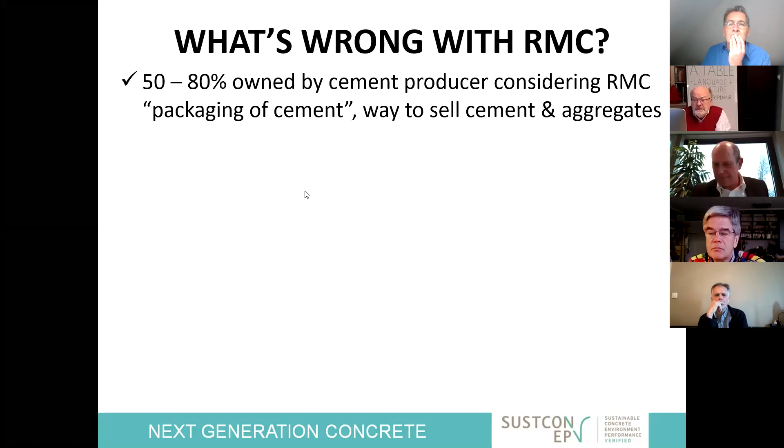Thank you, Johan. I'll try to make it very short. I sent out a questionnaire to everybody to have their input on what they consider is wrong with ready-mix concrete. I received only a few. The one most remarkable said, I'm not going to tell you because otherwise we will only buy prefab. But that was not the answer I needed, okay?

Of course, what is wrong, here we have a list. It is owned, for 50 to 80%, by the cement industry. And as somebody said, they consider it packaging of their product. You can see that when they charge you €4 more if you want concrete with less cement. And of course, the worse the aggregate, the more cement is needed.

Process control is Labcrete, which is not quality control of the actual product, because the structure is Realcrete. We have 27 different EN206s, so make your choice which sauce you want over that EN206. This has nothing to do with technology, that is pure market positioning.

The production and the placing is done differently by different companies who can blame each other. And the language of communication is a problem, and there's no basic training, etc. You are welcome to complete this list. Next, please.

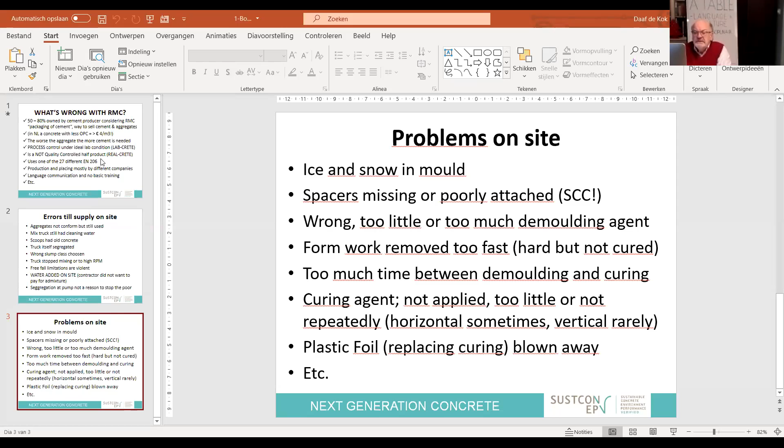Now, the other one was, where was it? Well, this was a little too fast, Dave. Maybe you can bring it back on the screen. No, the second one. Errors on site, what is wrong? Okay, next. Maybe I messed it up. You just go to the next slide.

Errors still till supply on site. Aggregates are not conform but still used. We don't like to send back a truck or a shipload of aggregates when it's not in quality. Mixed trucks have cleaning water, scoops had old concrete, trucks itself segregate, wrong slump, truck stop mixing, free fall limitations are violated, water added on site is the biggest one. And we know all that because the contractor doesn't want to pay for admixture, so the cheapest admixture is water. Okay, segregation at the pump.

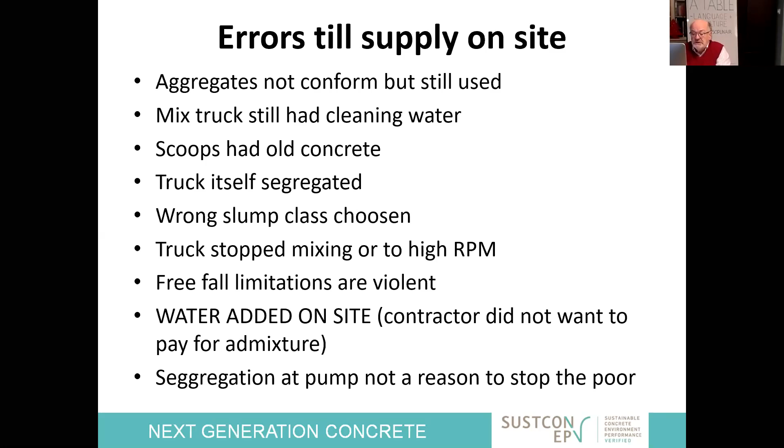The next, please. You all get these, of course, in the manual. Ice and snow in mold. I wish this was a problem in the Netherlands.

Spacers missing. We have seen somebody filming a self-compacting concrete pour where all the spacers just floated away. And of course, people are not going to stop the site because that's too much of a hassle.

Now, big problem, demolding agents, too little, too much, too thick, formwork is removed too fast. In the past, we used to have wooden formwork, lost formwork, which was a fantastic curing means.

Now the companies that have the mold, the formwork, they are there the next day to take it away. So too much time between demolding and curing agents not applied, too little, not repeated, etc. Plastic foil is blown away, etc.

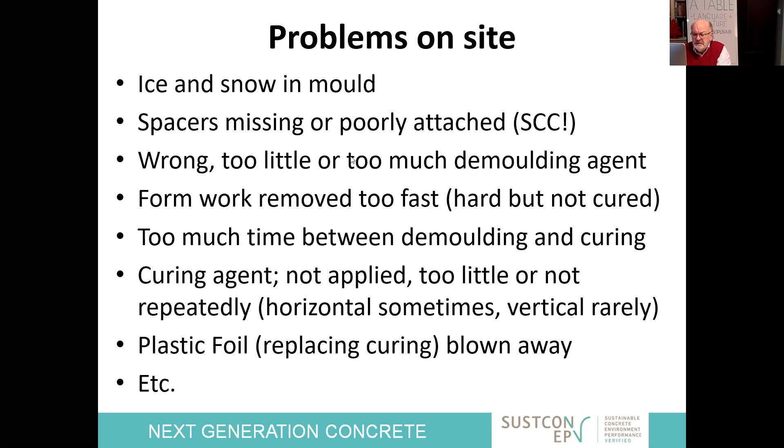So here are all the problems shortly listed. I have not qualified them too much and not quantified, but this is a good base for this afternoon.

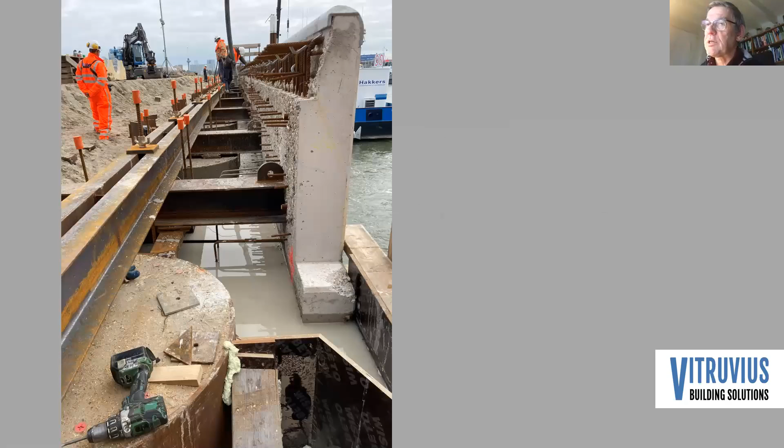May I have the next slide? Then you can see what this was, the work. The concrete was used to fill the gap between the prefab outer layer in a harbor and the wall, and so we did a lot of tests on that. May I have the next sheet, please?

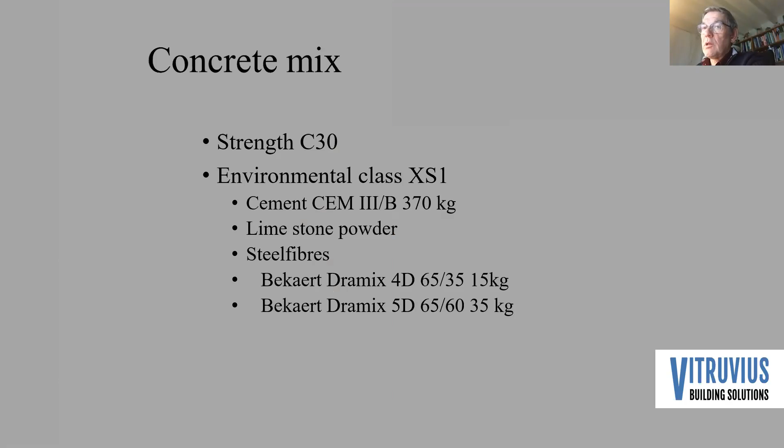The concrete mix was the following: strength C30, environmental class XS1. We used a lot of cement in it, 370 kilos, because we had a lot of steel fibers in it: 50 kilos of steel fibers, long ones at 35 kilos, and very short ones at 15 kilos.

Afterwards, we made a lot of test specimens. About half was cured underwater at 20 degrees, and the other half was cured in air. The water cured gave a nice result of about 43 megapascal at 28 days for a C30. Air cured only reached 36.

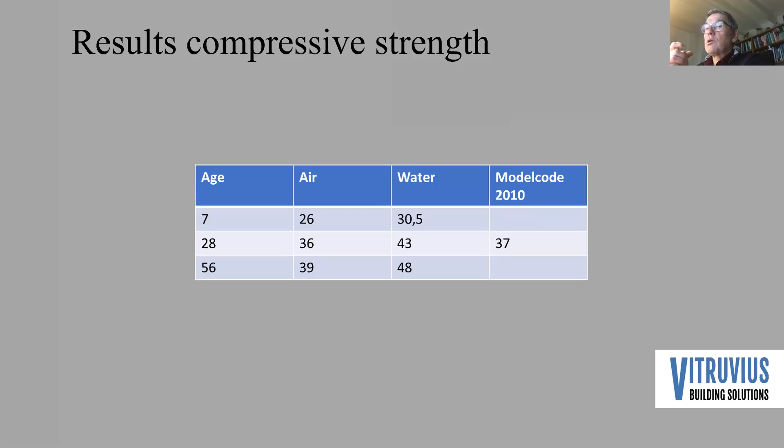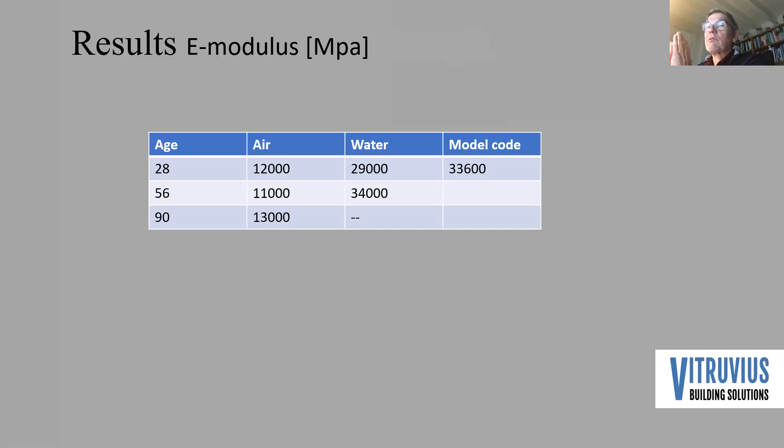We also did the Young modulus, and what we found was that the air cured samples were about a third of the water cured. So the construction engineer was getting a bit nervous because he got numbers he wasn't used to.

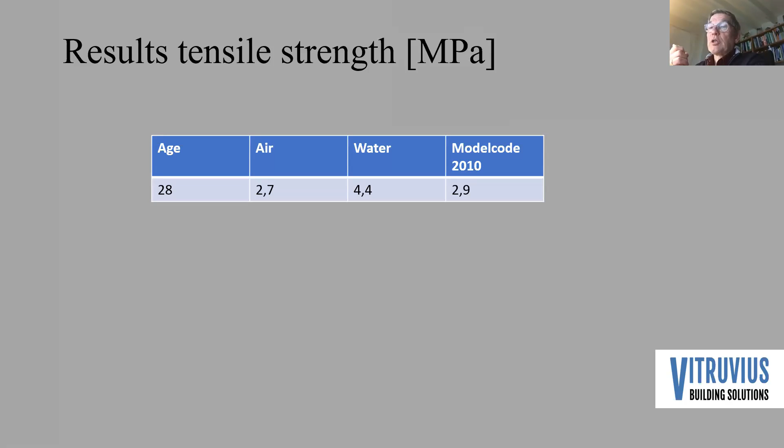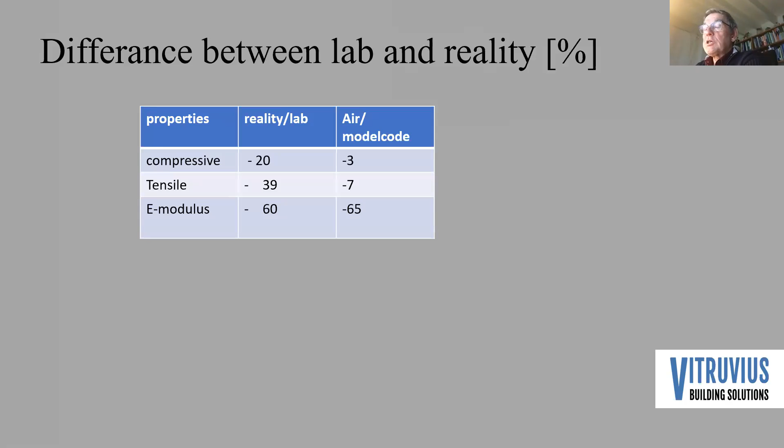If you look at the difference between the two, depending on the condition and what you are measuring—compressive, tensile, or E modulus—the difference is between 20 and 60% lower if air cured. So only if concrete is cured underwater do you find the properties used in the codes. Depending on the curing conditions, the top layer of a construction will be at least 20% less durable, and in the worst case, 60% less than expected.

Thank you very much for your attention.

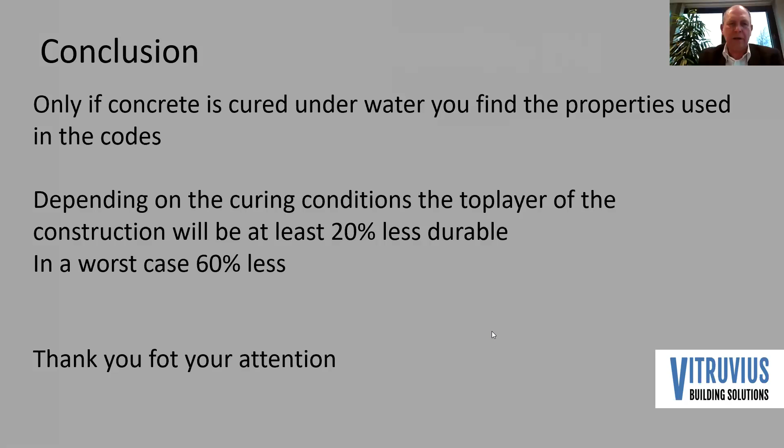Does anyone want to comment on the presentation? Johan, you have two pages, you have to look also at the second page. What do you mean with two pages? You see on the screen there are two pages, you mean the chat. I don't see anyone raising their hand, or— Yes, hey, yes, okay, Danilo. Dan, yes, go. Dan is raising a hand.

Yes, please. We don't hear you, Danilo. Good afternoon, everyone, can you hear me? Yes, yeah, yes, now it's okay. I just pointed on a question. I want to know more about the conditions of humidity in the air in which the samples were treated. Can you describe more, please?

The humidity of the air cured samples was about between 60 and 80%. But then, from my experience, what we wanted to say—in ex-USSR countries we usually cure specimens in air, but in very humid air, about 95% humidity. So these results are usually far better than water cured. Have you experienced such a different situation?

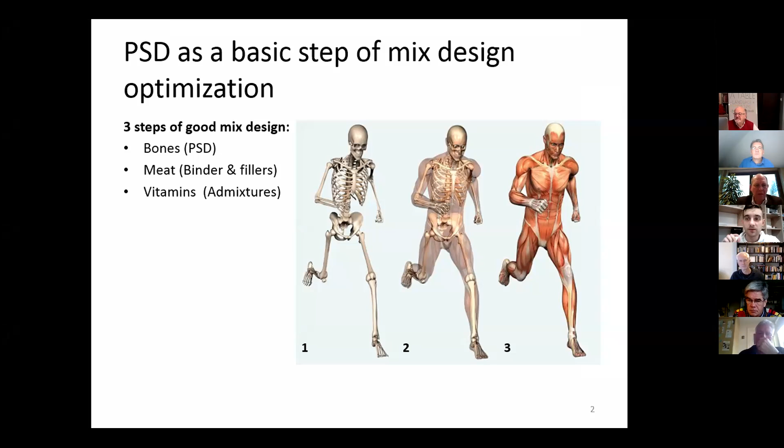Usually I explain the mix design in a very simple way—I compare it with the human body. First, we should create bones, the so-called granular skeleton. Then we put some meat on it, which means binder and fillers, and then salt it with some amount of vitamins, admixtures, and this gives the concrete some superpower. But my very clear message to you today, as a founder of a Ukrainian admixtures company, is that with a broken leg, vitamins are not effective. If you have to fix something, you should first look at the granular skeleton and start your mix design from there.

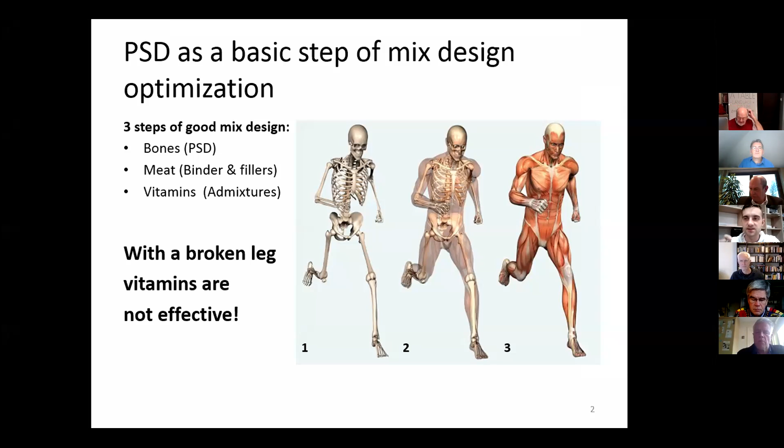Our methodology is based on manipulating the voids content. What really matters from the side of aggregates? This is simple, 3 factors: grading, surface shape, and surface texture.

Of course, there are many more characteristics of aggregates that should be considered in the mix design, but I will focus your attention on these 3 because they affect mostly the packing density.

So what we do is blend different materials and measure the bulk density, which represents the void content. It's very simple, just a cone and a bucket, that's all.

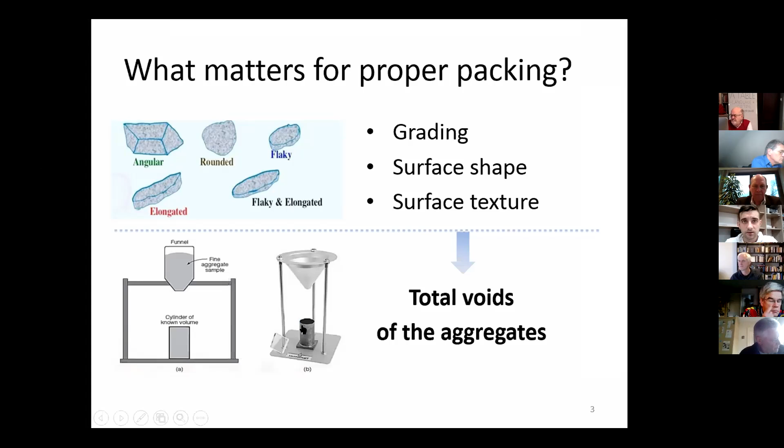So, of course, our methodology is competing with the traditional grading approach and specific surface concept. But I want to show you some examples.

There is one ready mix plant supplied by one quarry. They erected a new crushing line. The old one, which you see on the left, used the old material with a flakiness index of 32%. On the right side, you can see, look on the video.

So this is a totally different concrete, just from changing the flakiness index from 32% to 11%.

We were also very surprised that with the same formulation, same mineral, same RMC plant, everything the same, just the flakiness index moved, we got this kind of result. We have less voids, more paste, and the concrete is more flowable, more creamy, even though the grading was completely the same.

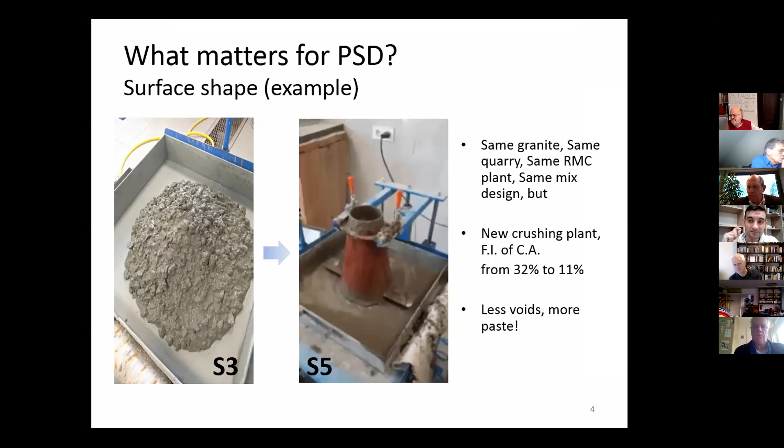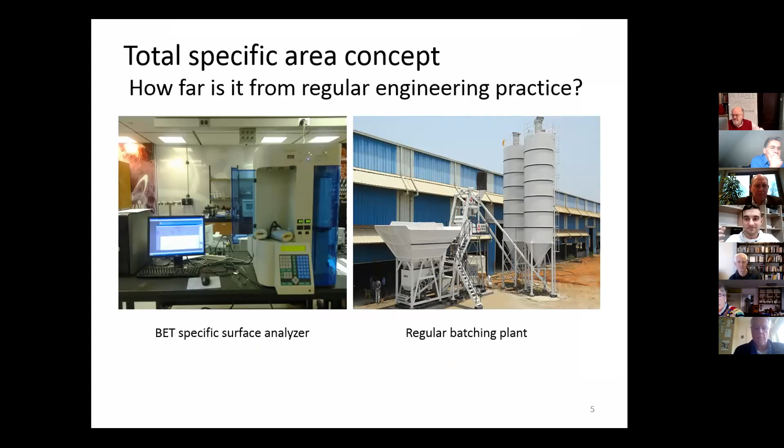And what about the specific surface concept? Just look at this sophisticated analyzer for specific surface area versus a regular batching plant. How far is it from regular engineering practice? So I guess the cone and bucket is pretty simple and useful in real practice.

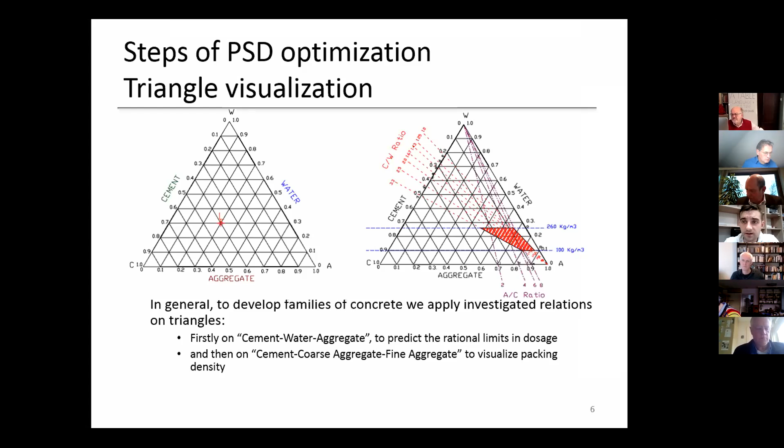Our methodology started from building triangles for visualization. For voids content optimization, we use a triangle with cement, fine aggregate, and coarse aggregate. I will not have much time to describe the methodology in detail, but I put the information in the slides. You can look thoroughly there later and ask me questions.

This will help you understand it. But in very short time, I will describe it. First, we optimize the fine aggregate and the binder, and then we optimize the coarse aggregate voids content separately.

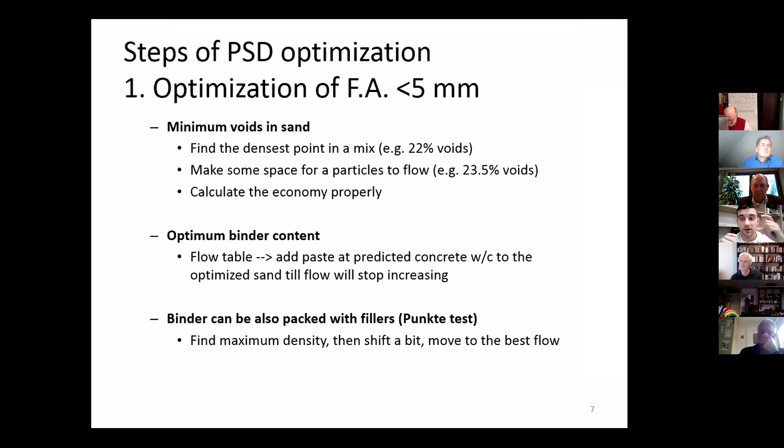You can also use this methodology, the so-called Puntke test, to optimize the granulometry inside the binder. Then you put the three parts together in the best proportion to have less cement, less CO2, and be more cost efficient. Usually if the rheology is better, the compressive strength is also higher.

And of course you have to do some fine tuning after moving from the lab scale to real scale, and check the laboratory results against production. Thanks for the attention. If you have any questions, you are welcome to ask me.

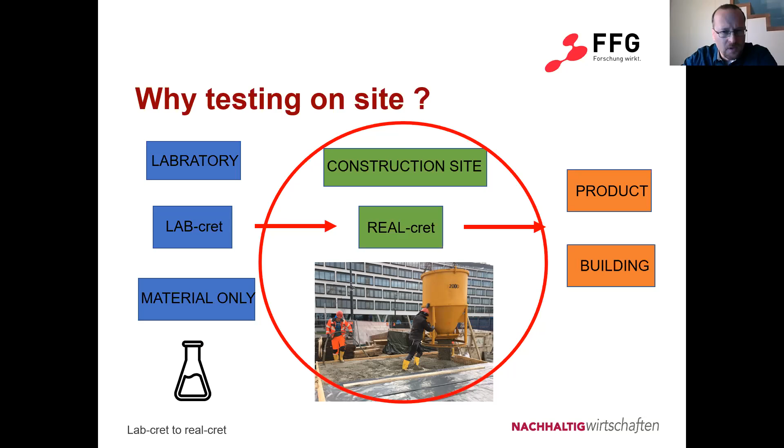The big problem, next slide please - the problem is that the culture of our construction is a bit different. In the past we had the first concretes, this is the green line, and the concretes today are high potential concrete.

They are high-tech materials optimized for easy handling on site. This is the blue line - the work the workers have to do to bring the concrete into the formwork is getting lower. We use super plasticizers and retarders to optimize the concrete so it's very easy to handle on site. The horizontal line is given by national rules and normatives for curing the concrete and how to bring it into the formwork. The dotted line is what we sometimes see on site.

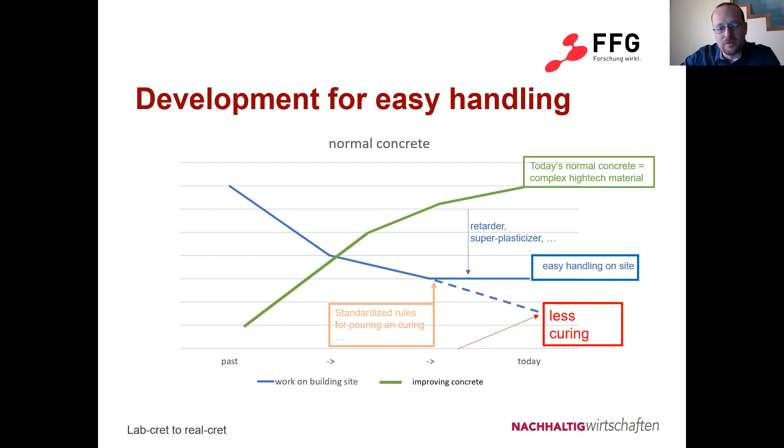The workers use the high-tech material - next slide please, go back two slides if possible - this standardizes the rules, and so we see on site that sometimes there is less curing. They do everything to save money. There are sometimes mistakes on site, and sometimes less skilled workers use the concrete as well, because the concrete is high-tech. It does everything - it's sometimes self-compacting, it's good to bring in, and we have no problems with standard high-tech concrete.

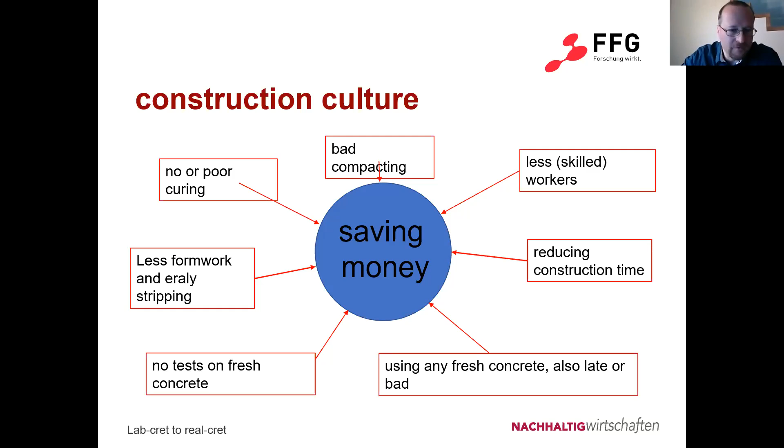I don't want to say everything because I have so little time. Please go to the next slide. This is the problem: RCC concrete needs to be cured, needs care in bringing it in and pouring it. We have to cure it - as Bodin said, this is very necessary. And as Johannes Horvath said, we need guidelines to use it. We have some, but not for every concrete concept, and for this concrete we now want to use, we have no guideline. So we are going to test that, to move on from Labcrete. We've done a lot of laboratory tests, but we need on-site tests to see what we can get and how we can handle that.

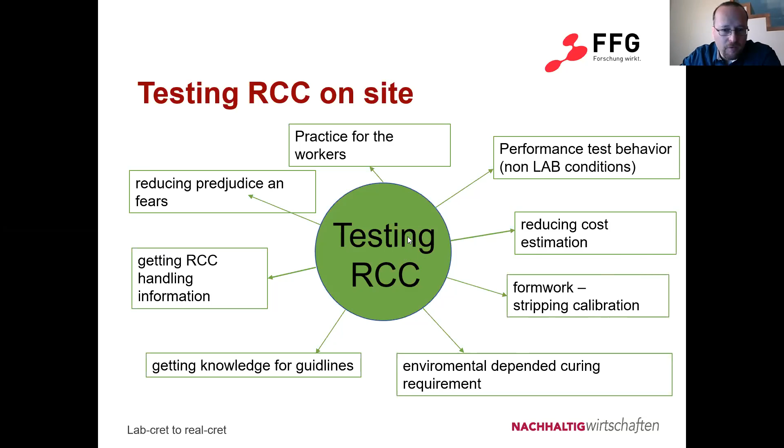In the next slide I made a sketch showing what testing brings us forward to use RCC concrete: practice for the workers, reducing the prejudice and fears of contractors that it's too expensive, or they can't handle it, or the quality isn't good enough. Getting RCC handling information means quite the same - getting more knowledge for guidelines. We are designing guidelines, as you heard yesterday from Johannes Horvath. We can test the environmental-dependent curing requirements - the temperature and curing conditions we can give to the concrete. And formwork stripping calibration - when can we get the formwork free?

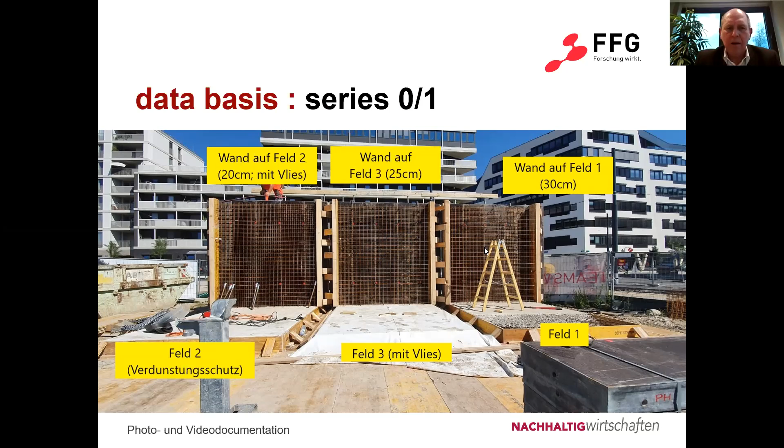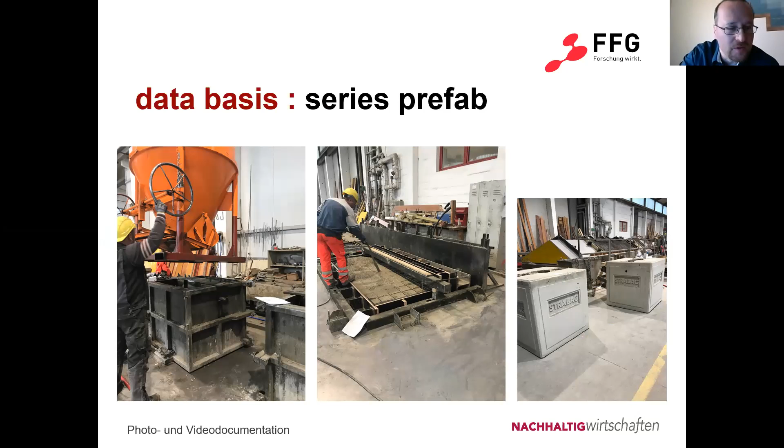Yes, these are the results. Johannes told us we have some results to produce today. Maybe you can look in detail at the given information here. Concluding, we tested some thickness walls and slabs and the curing effects, and now we are in a way to give advice for the site to use the concrete on the real building.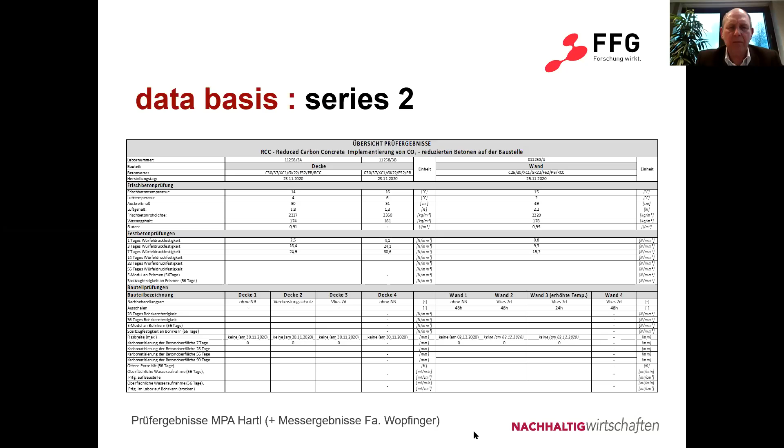Thank you very much. Apologies for the beginning, I was referring to reinforced cement concrete, but it's about reduced carbon concrete. It's a new terminology. It's important, and it's this kind of exercises and demonstrations which we will need to convince contractors to use the new materials.

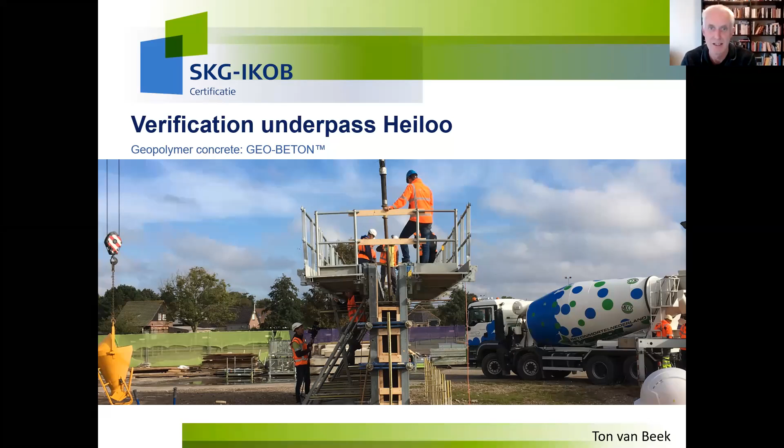Next slide please. To start with, I first have to explain what verification is, because as technical manager at SKG IKOB, normally we do tests for certification, and we go to companies, ready-mix concrete plants for example, to see if they do their checks and have their lab concrete okay. But now we had something very different, something innovative. How do you deal with this innovation?

This verification is explained by two axes: one is early research, a brilliant idea, and the other is when it's available on the market - the horizontal line and the vertical line. In the beginning you have no standards at all, and in the end, once it's complete, you have a lot of standards on the vertical line. Next step please.

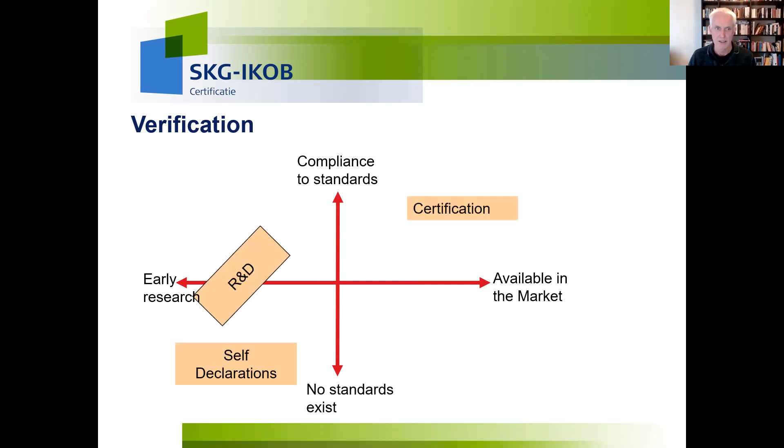So you begin with R&D, a self-declaration of your product, in which you say it's brilliant, it has low carbon performance and very high strength - that's normally what everybody says about his new product. Then later on, but there are no standards in the beginning because the product is completely new. It's not within the current standards we have for concrete.

So we have to see how to deal with this performance claimed by the man who made the facility that produces the concrete. Only after many years normally can you go to standards and certification, but this time we used a verification process instead. Next step please.

In this verification we didn't need certification yet, because we only wanted credible performance data of this new product, this geopolymer concrete. Next step please.

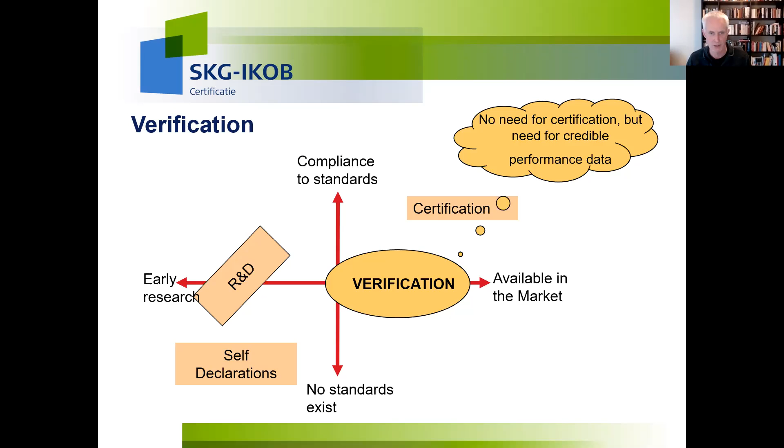And we did this through prototyping, and Heiloo was kind of a prototype. This verification process is presented here as a linear process, but I can tell you it wasn't really linear - there was a lot of debate, a lot of discussion. But we started with a brilliant idea about building this underpass with a wall in it made from geopolymer concrete. There was a technical design, with a lot of material parameters from the laboratory, the lab concrete.

And that was the first assessment: can you make with this lab concrete a real concrete structure? So we made the first report. It said, okay, if you look at this data, it should be possible. Then we went to the control situation in real time during the construction, and in the end we made a statement: the following performances were valid, backed by a lot of data from the contractor. So we had a lot of data, and in the end it could be used in practice. Next slide please.

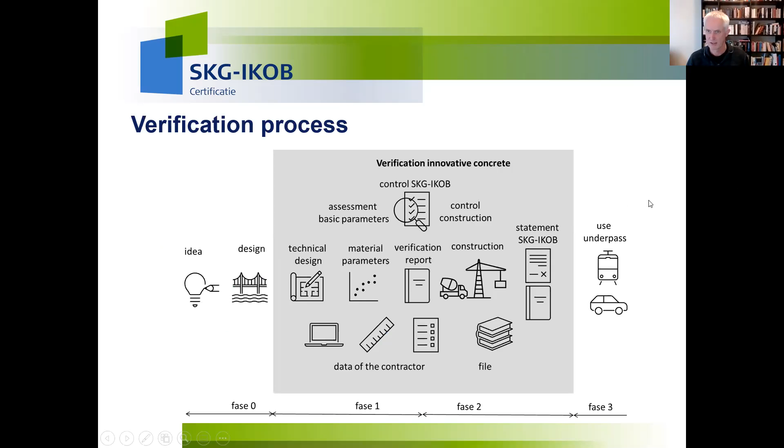Because the performance of structure can be of many different types. I took the 7 normal performances of a structure as stated by the European Committee: mechanical resistance stability, safety in case of fire, hygiene, health and environment, safety in use, protection against noise, energy economy and heat retention, and sustainable use of natural resources.

But not all those performances are always applicable for every structure. So in this case we did a risk analysis and said only the mechanical resistance, the impact on the environment, and the sustainable use of natural resources were looked upon.

So we asked the contractor: how do you give me, as a certification body, your performance of the structures, and what proof will you deliver that this mechanical resistance, this leaching to the environment, and this low carbon impact will be proven?

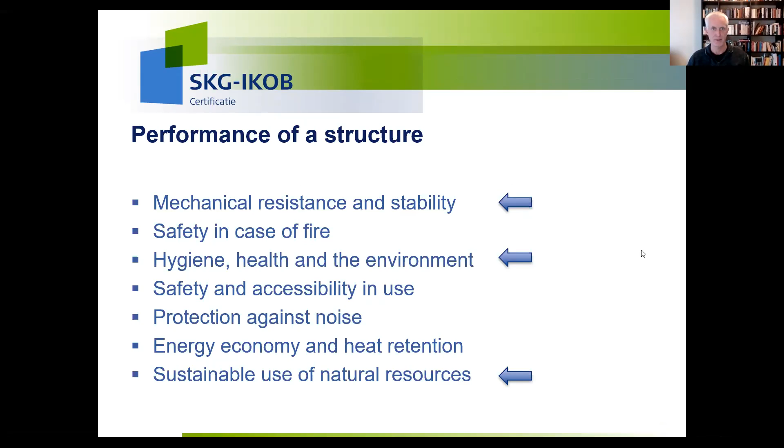Now, for the performance of the structure, a lot of lab tests to begin with just to get a good mixture. We also asked them, how do you give instructions to the ready-mix concrete plant? Because they have to make this concrete, and they never made this concrete before. How are you going to teach these people that this concrete is the same or different, and what are the differences also on safety?

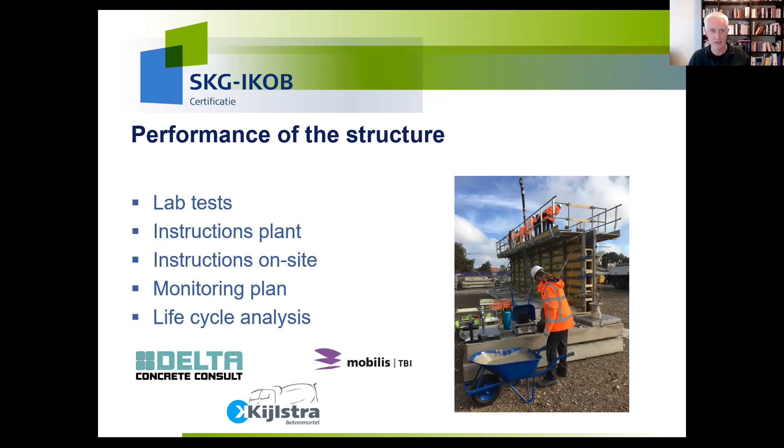The same applied to instructions on site. Are the people working on site well informed on how to deal with this new type of concrete? And once this concrete is in the structure—you see here a picture of a mock-up they made before they made a real wall—this was one of the methods to learn how to deal with this concrete.

And how to do tests on this concrete—not only lab tests, but also a lot of field tests to see if the curing compound worked well. We also got a life cycle analysis from this concrete structure to see if it really achieved carbon dioxide reduction, yes or no.

The conclusion of this complete process was rather funny, because it was designed as a concrete structure. We all know that geopolymer concrete is not concrete, but it looked like concrete in practice—it behaved like concrete, poured like concrete, and there was really nothing different.

One difference was that there was a lot of attention by a lot of people looking at it. I've never seen so much quality control on site as during this project.

And in the end, the performance of the concrete—mechanical, etc.—yes, most of the performances were met with ease, to be honest. Also the difference between lab test and field test, as we heard before—if you took the safety factors into account, it was okay. Thank you for your attention.

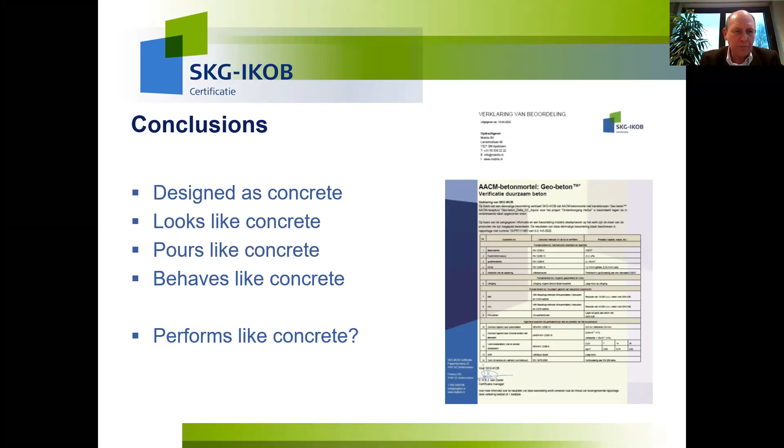Thank you very much, Tom. It was a very interesting lecture—working with these new materials but still making reference to the construction product regulation, trying to show that this material behaves like other concretes, and you can follow what's happening with the necessary verification.

I thought you spoke about a linear process—did you say a linear process? I would just suggest we have to go to circular processes. Everything in the future should be circular. So feedback from your testing to the lab, but I'm sure you're doing that.

Any other questions for Tom? We had some questions in the chat on the presentations which will be shared. I see Boudewijn has a question, but Boudewijn, just stand by—let me check if there are other questions. If not, Boudewijn, I'm pleased to come back to you since you're the organizer. I understood we'll also have 5-10 minutes of discussion on a presentation given yesterday—can you address whether we stick to this program or change the schedule a bit? We're not too bad on timing.

Yeah, just to comment on the presentation from Tom—there is a very important dimension to this verification, and that is the coaching. Because you're doing something new, and you don't hide behind a standard saying look at Article 2.5.3. You are really getting into a new field with a lot of attention, like Tom said. So the coaching aspect of verification is also very important.

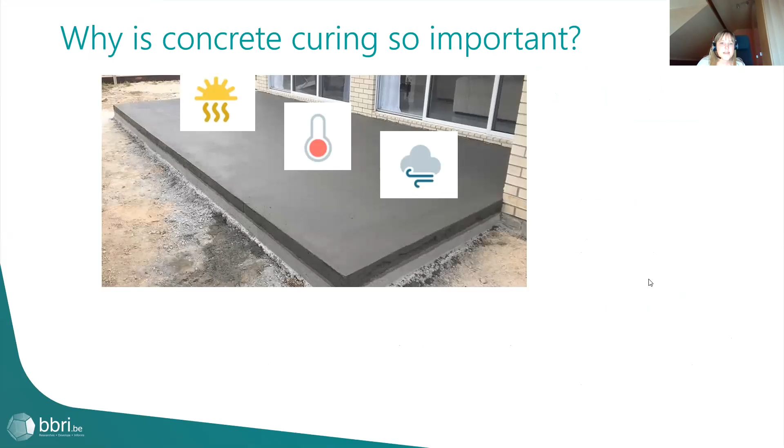The consequences can be dramatic, such as a bad strength development, cracking due to plastic shrinkage, thus reducing the lifetime of the concrete, and also a bad appearance.

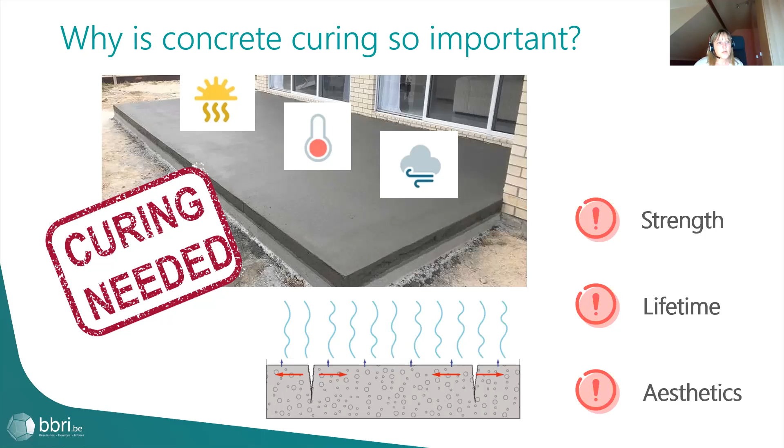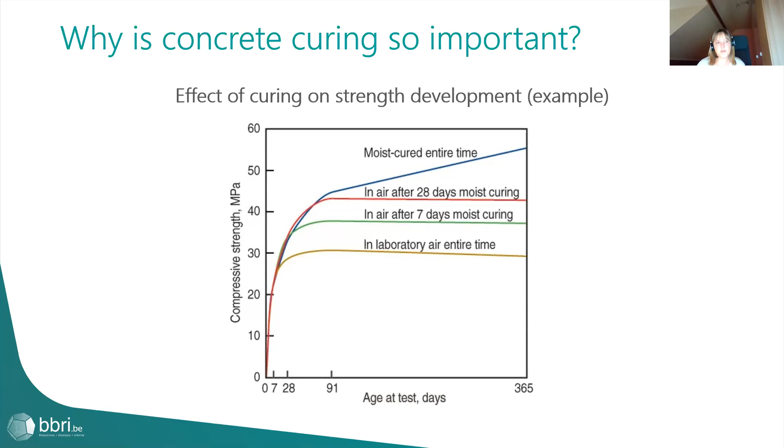You see here what can be the effect of curing duration on the compressive strength development of concrete. No curing, shown in the yellow line on the graph, leads to a drastically lower compressive strength than that obtained when applying moist curing. But we have already seen other examples in the previous presentations. And in addition, we have to keep in mind that new habits, such as the use of additions in concrete, make it even more sensitive to curing than OPC concrete.

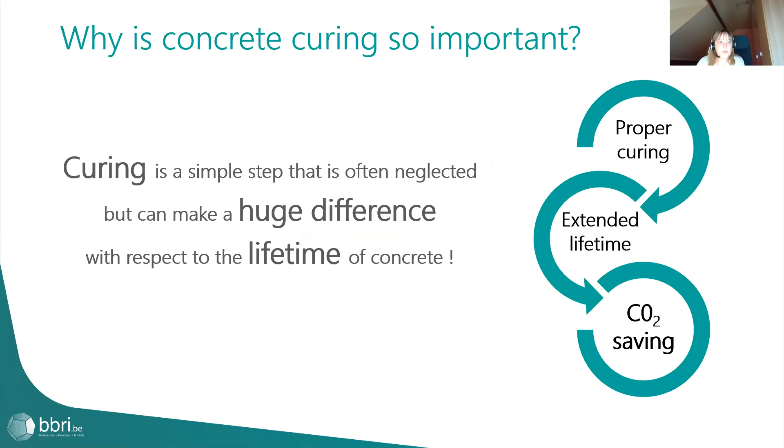So remember that curing is a simple step that is often neglected, but can make a huge difference with respect to the lifetime of the concrete structure, and makes it possible to get the most out of concrete. And this way we can say that it leads to a reduction in CO2 emissions.

One of the easiest ways to cure concrete in place of conventional and prolonged wet curing is to apply a liquid curing compound on the concrete surface. How to do that? By spraying the product immediately after placing and finishing for a floor or slab, or after demolding for vertical surfaces. When correctly applied within recommended dosage, it forms a surface film that reduces evaporation of water from concrete.

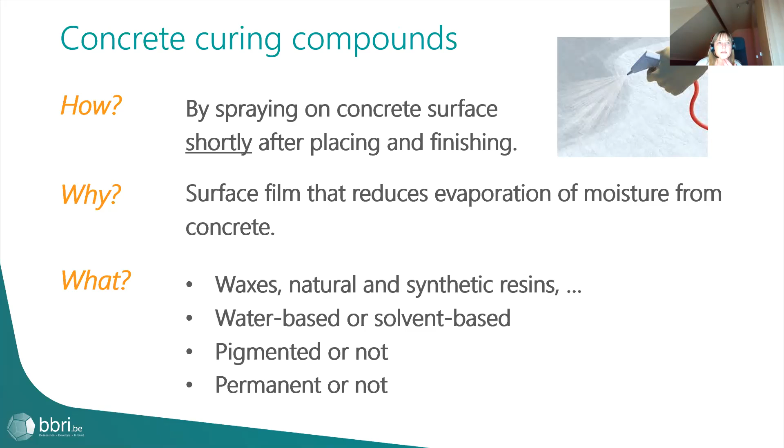These chemical products are mainly waxes or resins emulsified in water or solvent. They can contain pigments useful to check the covered area and also to provide heat reflectance. But be careful, as most curing compounds have to be removed prior to applying any coating. Here you can see some types of concrete elements on which curing compounds may be applied, such as roads, bridge decks, walls, and slabs.

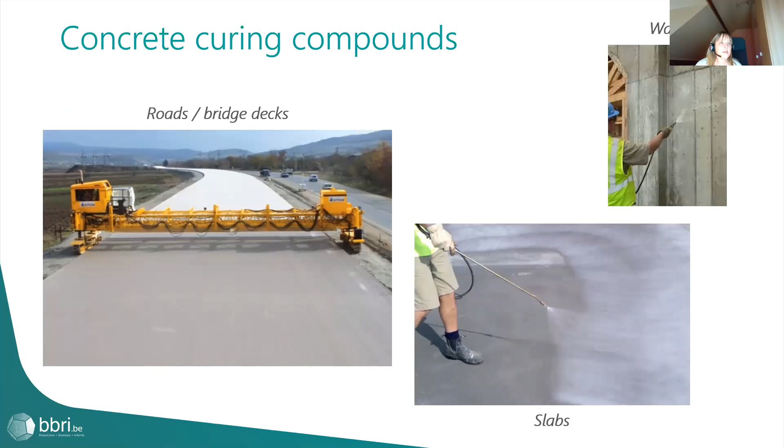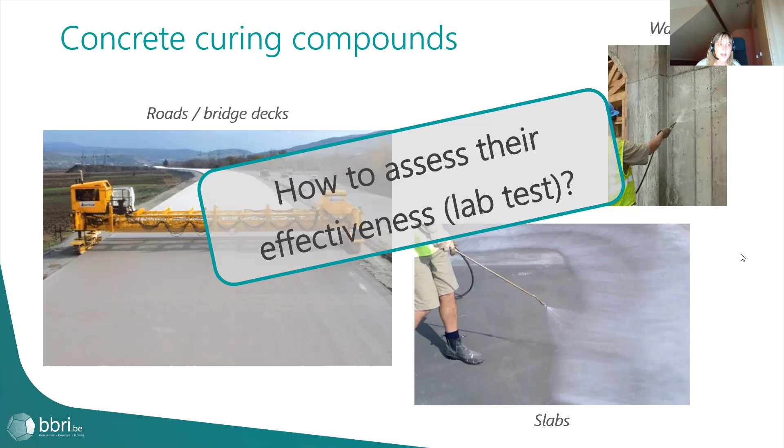For all these applications, there is an obvious need for a reliable test method to quantify the effectiveness of these products, to be sure to obtain a high quality concrete. For this reason, we have initiated a research project in Belgium. The main goals are to refine the existing test methods, but also to review the criteria used to decide whether a product is performing well or not.

A European technical specification provides a water loss test in lab for the qualification of curing compounds. Based on this, some European countries have published their own modus operandi. In Belgium, this is included in the technical prescription published by the certification body BE-CERT. This document does not yet give full satisfaction, and as a result of our research work, we hope to be able to publish a revised version within 2 years.

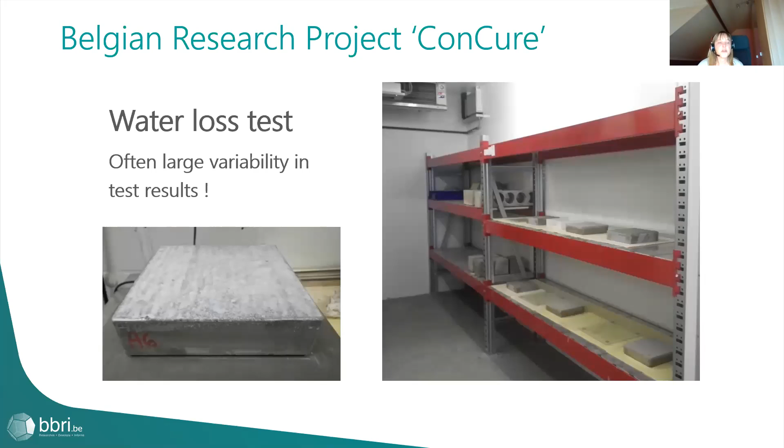The principle of the lab test is simple at first sight. It's a matter of comparing the loss of mass of specimens covered with curing compounds with that of reference specimens. But there are many parameters involved, including the concrete mix design, the way of removing bleeding water, and so on. So the method often exhibits large variability in test results, and this makes it difficult to decide whether the curing compound passes or fails the test.

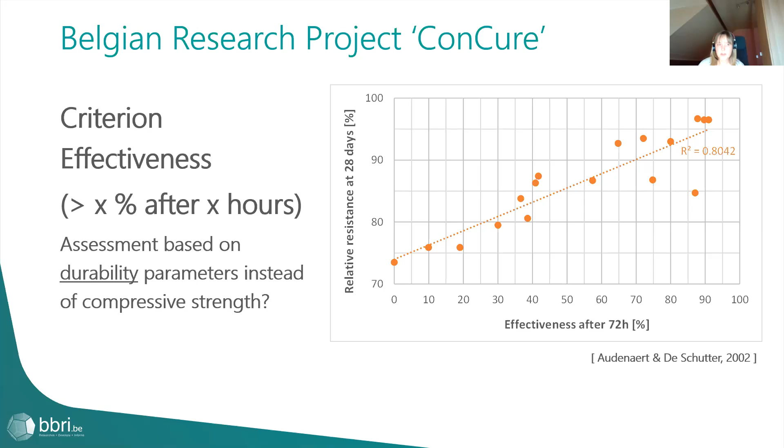The project also aims to revise the minimum effectiveness criteria for the curing compounds. In previous research works in Belgium and other countries, the evaluation was based on the loss of compressive strength of the concrete in comparison with specimens that had undergone ideal curing, as you can see here on the right on this graph. For further research works, we think it will be a good idea to consider an evaluation based on some durability indicators, for instance water absorption or carbonation resistance.

That's it. These are some reflections that I wished to share with you. Don't hesitate to contact us if you have any questions or comments.

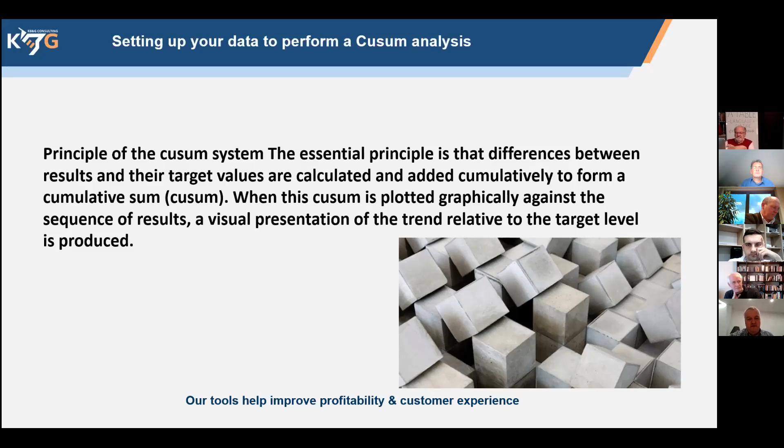So to start this, the first thing you need to do is define your target strength. There are a few different ways of doing that, but the basic things you need are characteristic strengths, standard deviations, those types of things. I won't go into the different methods of defining target mean strength, but the basis of this is to have a target strength that is statistically achievable for you.

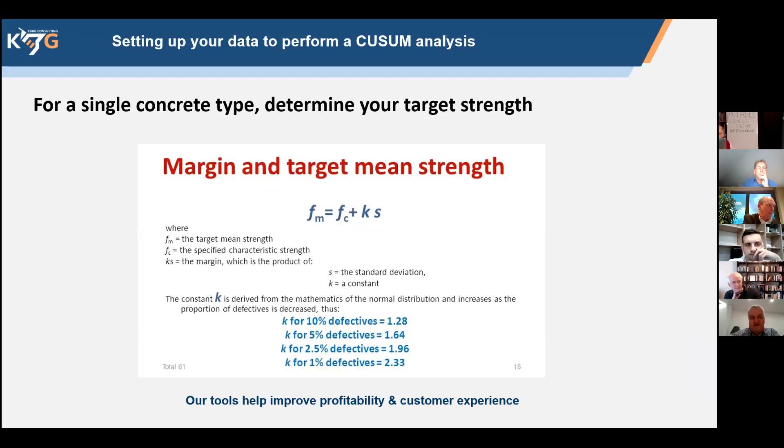The target strength is along the x-axis here, and remains at 0 on the CUSUM. So if all your results came in at exactly the right target strength, in this case 34.5 megapascals, the trend line would stay flat at 0.

Of course, we know that you very seldom get two test results in a row that give you the same result, let alone the same test result within a batch of cylinders or cubes. On the y-axis here, we have cumulative variation from target strength, and I'll show a quick animation of how the system works.

So the first test result, remembering the target is 34.5 MPa, comes in at 37 megapascals. The plot value will be 37 minus the target strength, giving a cumulative value of 2.5. So on the graph, we have a line showing we're slightly above target strength.

The second test result is 38.5 megapascals, and the plot value is 38.5 minus the target strength, plus the previous CUSUM value of 2.5, giving us 6.5. It's that simple, that rudimentary. You can start to see that with two results greater than target strength, the line is moving in a positive direction, remembering the target is to keep it at 0.

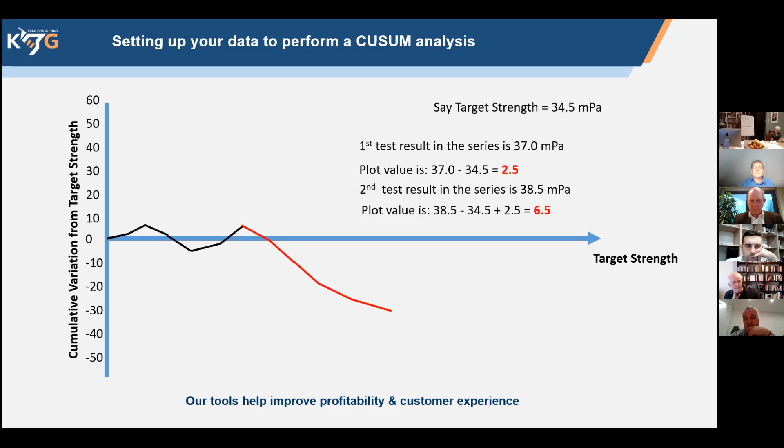The first is if you have 5 consecutive results that trend up or down, which is an indication that something has changed within your process.

Or there's a thing called a V-mask, which looks at different process limits for desired consistency, and the amount of consistency determines the width of the V-mask. You put the V-mask over the lead point, and in this case it's very tight, but wherever the line crosses it tells you there's an out-of-control situation.

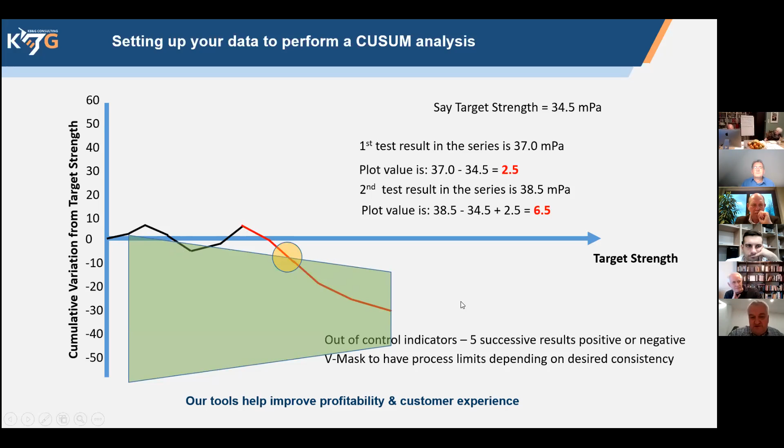As we can see here, the first line crosses, which also corresponds with 5 poorer-than-desirable results in a row. Looking at an individual mix over time, here's a good example of concrete that's not in control. You can see many of these masks where the lines are crossed, and areas or strings of data below or above your target. This is a good example of something we'd consider not to be in control.

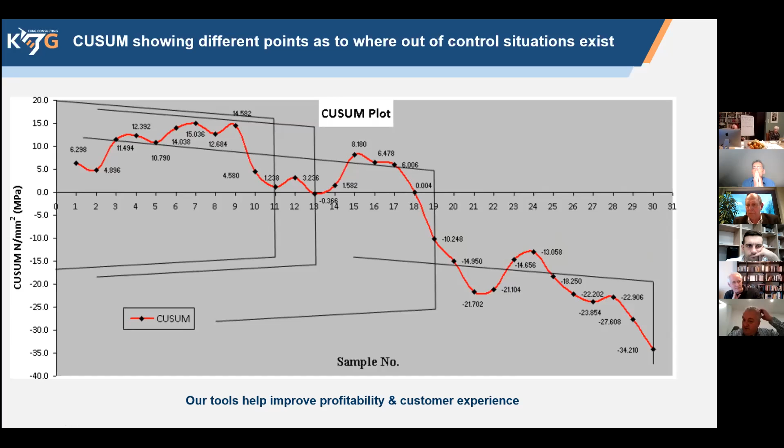So that's for a single CUSUM. There's a couple of different ways of looking at this, and I think it's one of the strengths of the methodology, that you can actually look at many different variables that have nothing to do with concrete materials themselves, or constituent materials, etc.

So we have the multi-grade CUSUM, where we can at one point in time look at all the different grades of concrete coming out of a given plant, to look at variation and try to determine whether or not it's a concrete material related problem.

Then we have the multi-variable CUSUM, and anything you can assign a target to, you can use this method for. Basically, you want to have it based on the same time frame. So you can look at plant efficiency, constituent materials quality, labor, weather, anything that's measured and can be defined. You can run exactly the same analysis.

And when you start to see the trends having 5 in a row or cutting the V-mask, you can go and look at these other variables and see if you can find the answer. It's ridiculously good at finding the root cause for different problems.

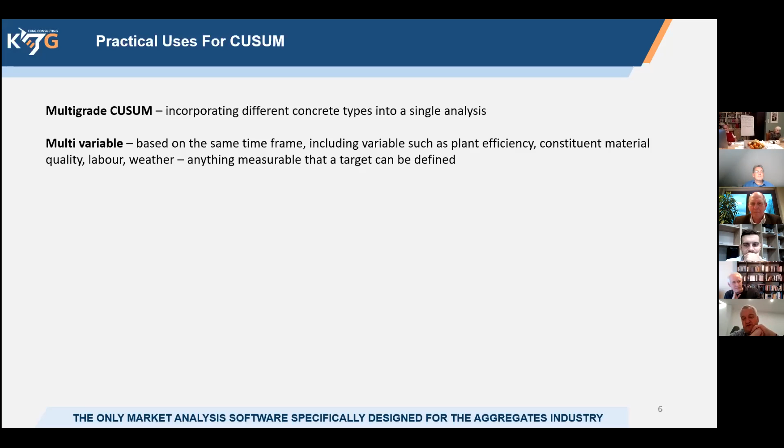And then obviously optimizing compressive strength and therefore binder quantity and type. If you're trending too high all the time, obviously you can remove binder. That's the loose link to CO2 in this particular presentation.

But the big driver for CUSUM is consistency. And we all know that the more consistent your product is, the more economic it is to make, and the more surety you have on the end result.

Concrete producers—I've been managing director for some of the largest international corporations in concrete—you'd be surprised at how poor things are. So yeah, it really pays to keep things simple and get the low-hanging fruit, as they say.

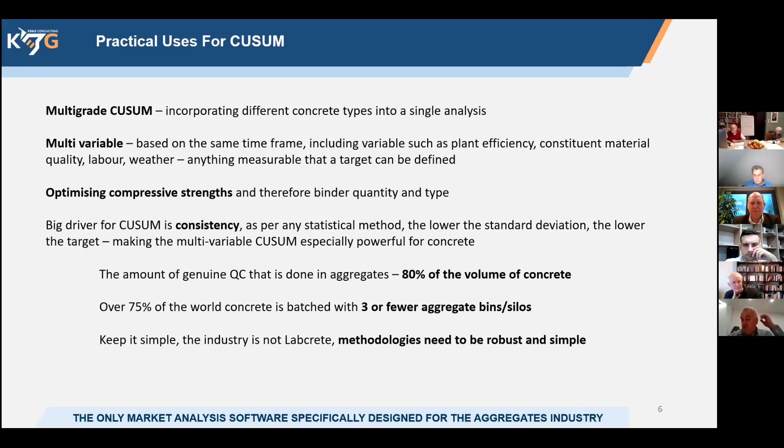Keep it simple. The industry is not Labcrete. Methodologies need to be robust and simple. So that's it, thank you very much.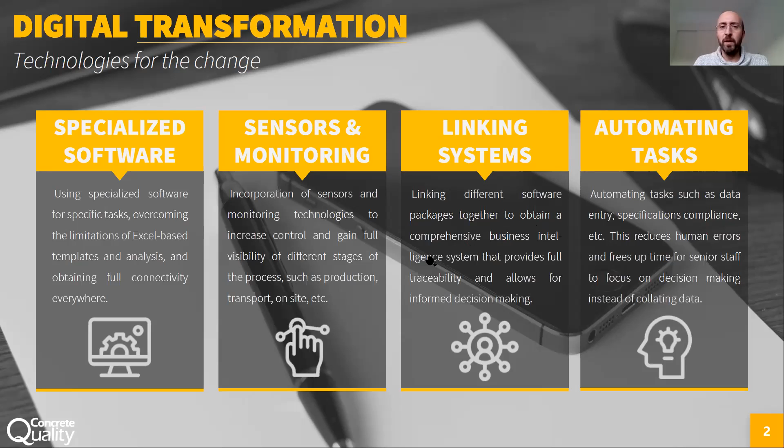And automating tasks. Automating tasks is not having a robot, this is not Star Trek technology. This is something that we can do today. All of these things exist today, and the challenge here is to put them together in the right way. This is how we transform the concrete industry, and we get these improvements and this performance-based system that we've been discussing these past few days. Okay, so next one please.

So concrete is in our DNA. I'm a concrete man, an admixtures man. I worked in ready mix, I worked in admixtures, I worked in precast, all with this quality control, quality assurance, and concrete technology, materials technology focus. And then I also became a programmer, so I have these 2 hats. And the people I work with, my team and partners, we all have these backgrounds. So we found a very good way to put these things together and improve the processes.

What I mentioned before, all these 4 things, we put them together: the ready-mix plant, in-transit monitoring, precast, things on site. What we've been discussing as well in the past presentations about the real time, knowing what's happening on site, and trying to connect everything related to this QA/QC focus. QA/QC with these 2 aspects: technical, with the statistics, with the CUSUM, with the particle packing, with all these methodologies, and also documentary with traceability, knowing what's happening so we can trace what has been done to the result that we get in the end.

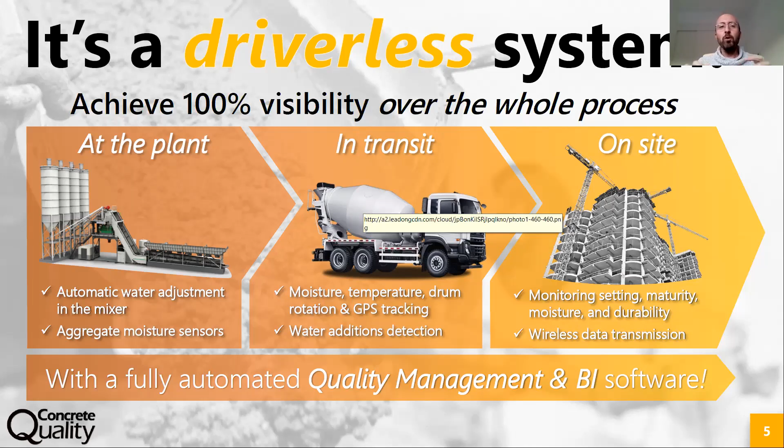This system can read an email with a PDF from a lab, automatically put it in the database, analyze if it's right or wrong, tell somebody they need to take a look at this. It checks the plant and tells the people on site if something happened at the plant, or if the driver did something along the way. All these things happen automatically. So next one please, and I'll take one more minute.

This is something I say: what happened with admixtures will happen with sensors and monitoring and this digital transformation in general. At first, nobody used these things and nobody knew what to do with them. And now it's unthinkable to work without them. So next one.

And this is the last one. You can read what's there, but imagine what could be possible if we knew all these things, if we had much better control, if everybody on site knew that everything was perfectly controlled. That if I add water to the concrete, someone else will know. That if I don't cure it correctly, someone else will know. How will people behave? How will organizations change? How will the culture in the concrete industry change? We think this is the best way, automating these things to take this LabCrete, this TheoryCrete, to the RealCrete, to make a real good and immediate impact in the industry, because this is something anybody can apply, and has immediate value and immediate impact on CO2 reduction, with cost reduction, optimization, etc.

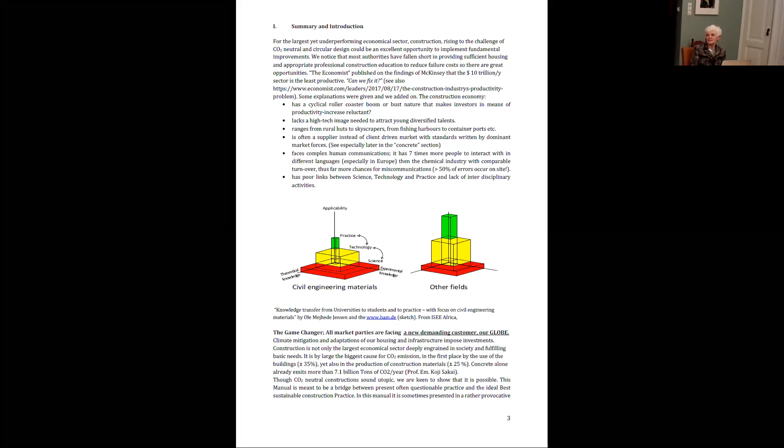We have made incredible big steps in refractory concrete, because if we wanted to put in a micronized something, that was our thing, because we were delivering performance. And if we are sticking to this prescriptive approach, we won't get anywhere anymore.

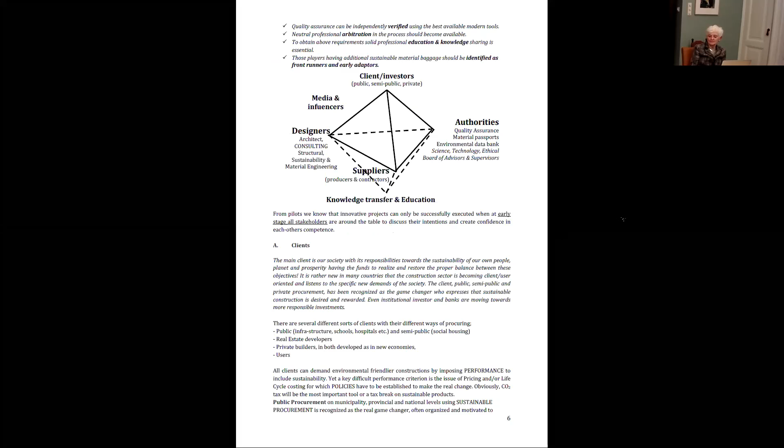So let's please, I'm telling the European Commission: lead, follow, or get out of our way. That's what General Patton said. Right now they have to get out of our way with EN 206. The person who made the mistake is retired in Spain. But he confessed as a good Catholic to me, and I gave him the blessing. But he has not done his, what do you call it, penance, Johan?

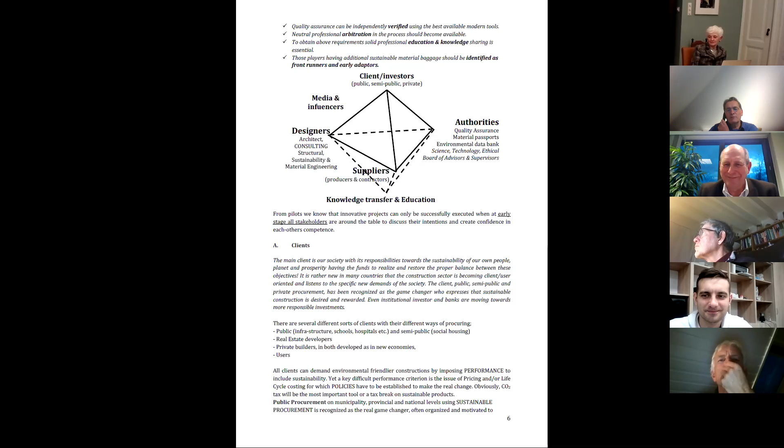I don't think we are running out of time. I think we probably were losing people, but we will send it. Is it too late right now? Dav, can we show quickly my last presentation? I will race through it. I don't know if you have it. Okay, this is no joke.

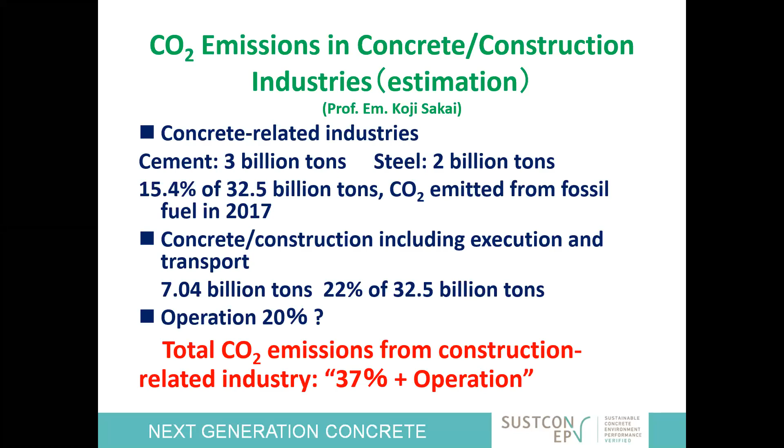We are emitting 7.1 billion tons of CO2 if you add everything together. It's not 8% because of the cement industry alone. No, the whole concrete industry is doing 7.1 billion tons. Next, just a race through this one.

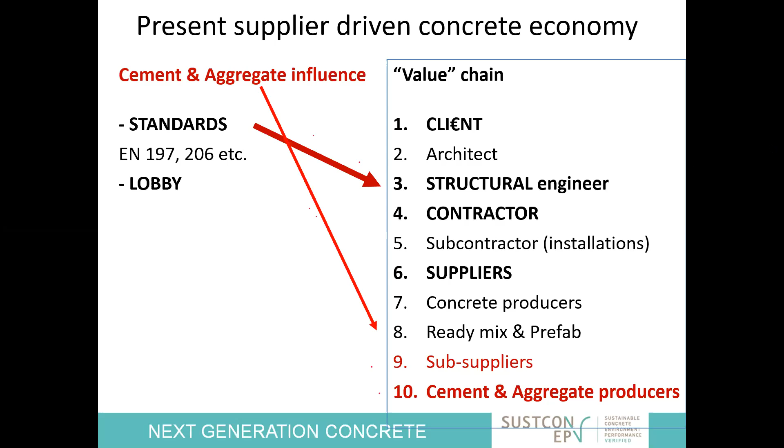The standards, the lobby, ECTP, Johan, we know each other from the ECTP. That was kidnapped at the conference in Amsterdam by Lafarge and by Heidelberg, who had the speaking time. We were all told to shut up. So it's completely kidnapped again.

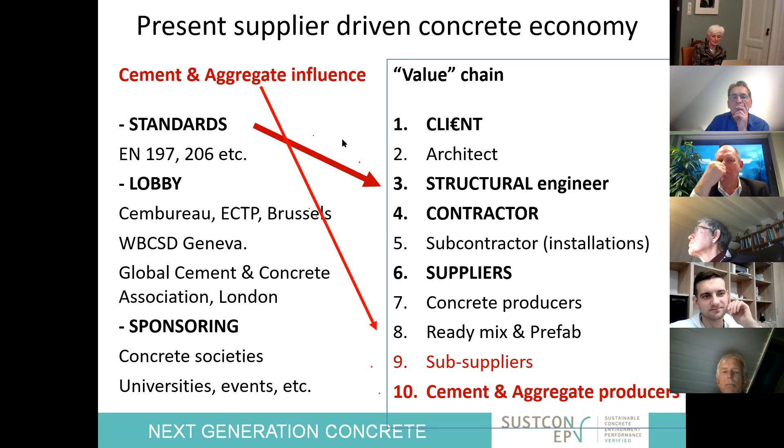So next, please. This is what we have to do. The client is on top.

We will empower the client, tell them what to look for, and the first day was excellent. We have the tools, we have the competence, and if they don't have the competence, they will go to the designers. They should have the competence, but they don't have it at the moment because we do not give them the information they need. The authorities have to know what to bless. And the suppliers, of course, if I can supply a lot, I'm not going to reduce my business. It's not coming from inside. No, and this is my point: education.

I really will challenge you to think with me about how to do the education, bottom up, because 50% of the problems are on the job side. We have to take care of that.

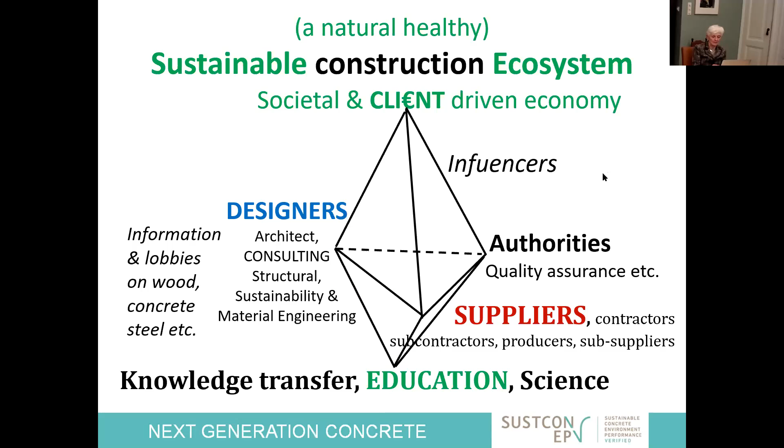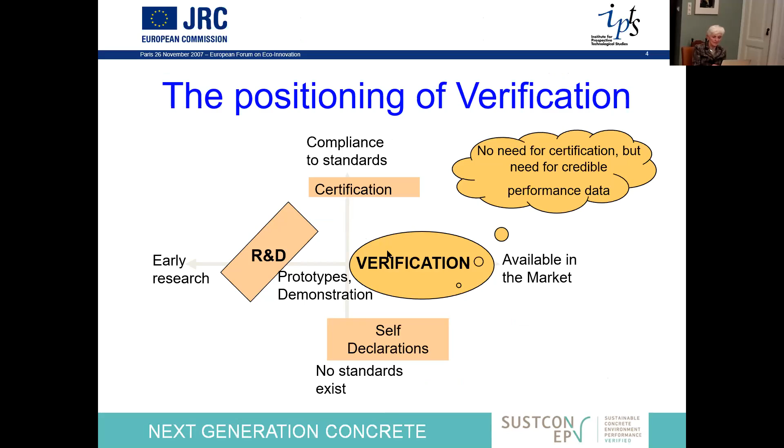We have the position of the verification. There's no excuse to be intimidated by certification. You have a self-declaration, and we can back you up with people like Tom van Beek, with the same spirit.

This is a famous formula. The organizations have to know we cannot take this without changing it, because technological innovation without system and process innovation is pure waste. When I came to Lafarge in '84, I discovered two patents of low cement concrete. They were not being used because the system was not able to take it. So we changed the system.

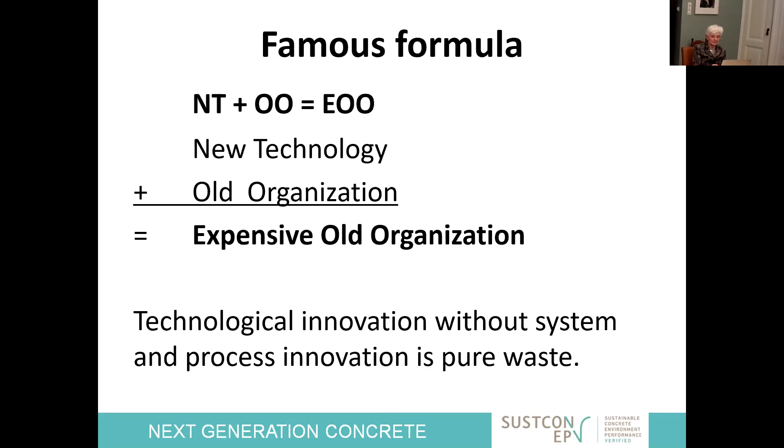I think that is it. What is next? Please think about that. What shall we do? I hope people can stay on a little bit, but otherwise we'll discuss by email.

Maybe you can show the paperboard right now. Again, if you finish this one, okay, you can ask them to put it on the chat. Daf, can you take it off and show where I am? Where am I based? I don't see myself anymore, which is maybe very good. Oh no, yes, I know what I did wrong. Here I am. Again, I was not supposed to touch this.

Okay, I would say à table. Everybody understands that. Let's sit down. Let the German-speaking people with a small group get together, and let's. I'm extremely happy, by the way, about the three Austrian musketeers. And with Wolfram, who has left his country already a while ago, I've worked for two German companies. I know how they think and do.